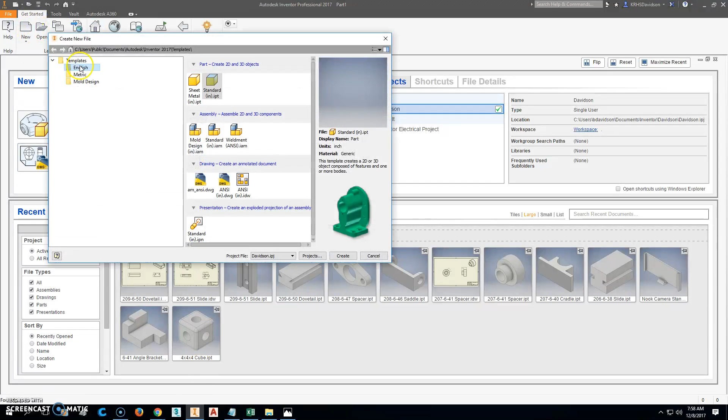We're going to start a new drawing, and it is an English drawing from there. So we'll click 2D sketch and start right here, and we'll start by making that circle that is 0.88. Notice I didn't put it right on there because I want to make it coincident constraint and put it right on that, so it's fully constrained. I can finish the sketch and look at that.

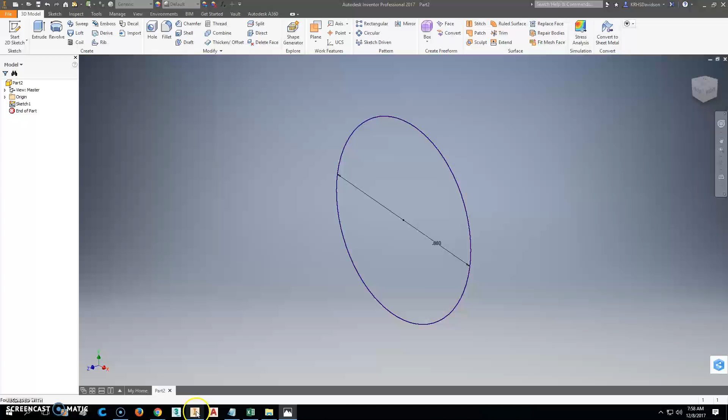And so that 0.88 goes back 1.5. So we'll extrude it 1.5, and I'm just going to go the other direction to keep my origin point there. So we'll go 1.5 and enter.

Okay, then we also had a circle right here. Right click right here and click a new sketch. And I'm going to put a circle on right here, that was 0.5, and I'm going to make it a concentric constraint between those so they have the same center point.

And we'll go ahead and extrude this so it cuts out, I think it was 1.25... 0.25, oops. So let me double check here real quick. I'm going to make sure it goes 1.25 deep, yep.

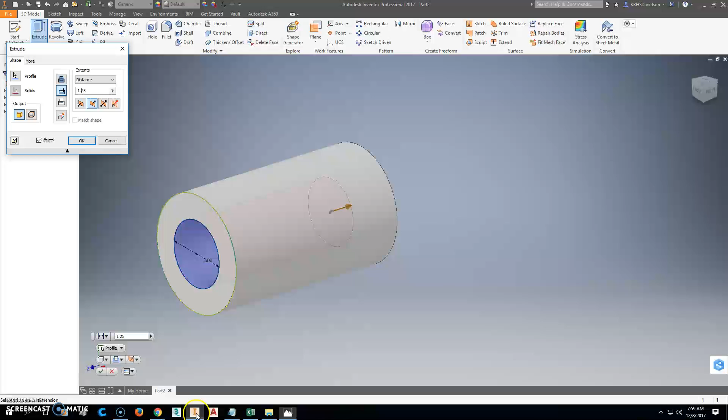Alright, so we've got that part figured out. The next thing we're going to do is the entire length of this part is 4 inches, we just made that 1.5. So we'll extrude this, or we're going to draw a circle right here on this. Create a new sketch, draw a circle here.

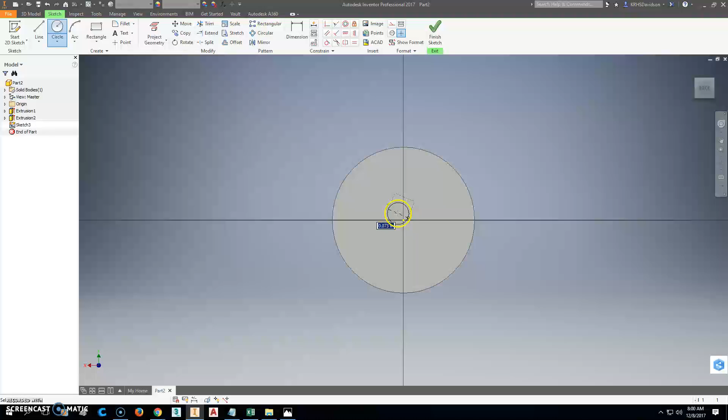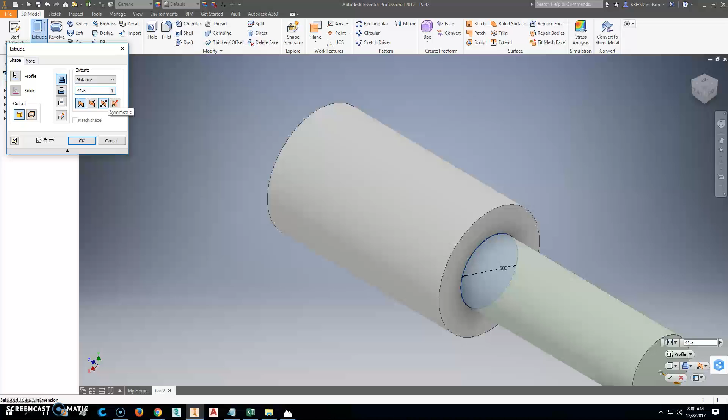And we'll make that 0.5 because that's what the thread is. We finished that sketch and we're going to extrude that then 1.5, or it'll be 4 minus 1.5, and that gets us the length we want it to be. Alright, so then we've got that part of it there.

There's a chamfer here, looks like there's a chamfer on both ends. Oh yeah, so there's a chamfer here, there's also a chamfer right there. We'll get, and then these 2 holes that are tapped holes that go in there. So let's try something.

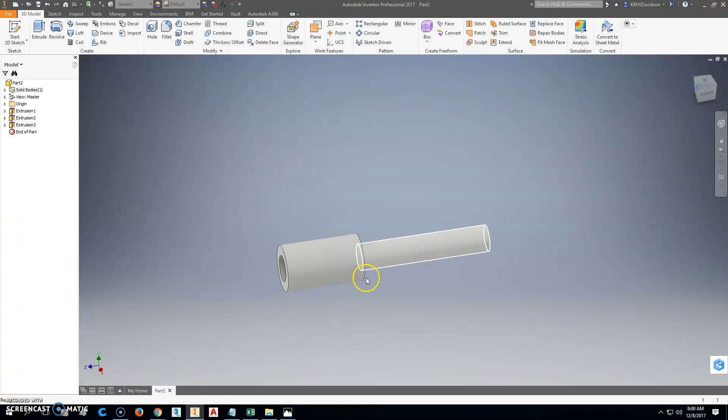We're going to try to put points right there on that surface. Actually, we're not. What we're going to do is this, we'll go over here, and because we went through the origin point, we're going to find the plane that goes through that center. So that's the plane we're on.

We're going to right click right there and click new sketch. Alright, if you hit F7 on your keyboard, it'll cut your part in half, and we're going to go ahead and put a point here, and we're going to put a point here. We're going to say that they are horizontally constrained, although I think I put them in place. Oops, we want them to be vertically constrained instead. So I want that yellow line to go through the middle there.

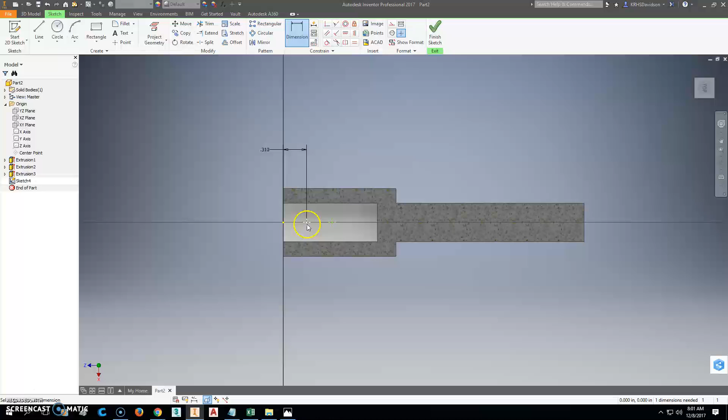Vertically constrain those together, so now they are vertically constrained, and the dimension from there to there was 0.31. Notice it turned blue, and the dimension from here to here was 0.5. Alright, so now that's fully constrained also. So I'm going to finish that sketch.

So what I'll do next is I'm going to use the hole command. I'm going to use a hole, and I want these to go in the other direction, I want them to go up. And I'm going to change this to be a threaded hole right there, so that's what you use, a threaded hole, when we want to make threads. So we'll click that.

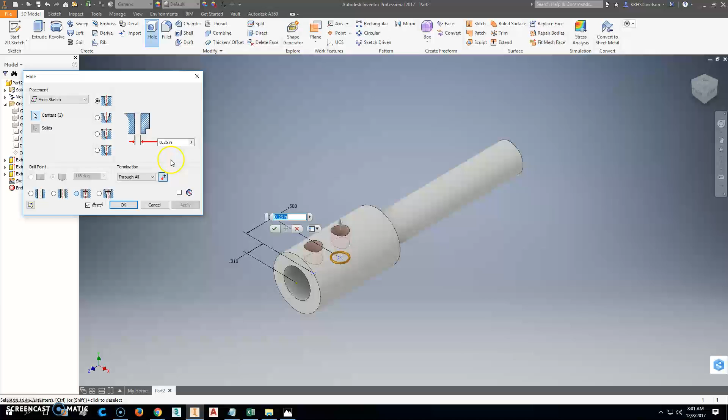Really interesting. It just took a second for it to think its way through it.

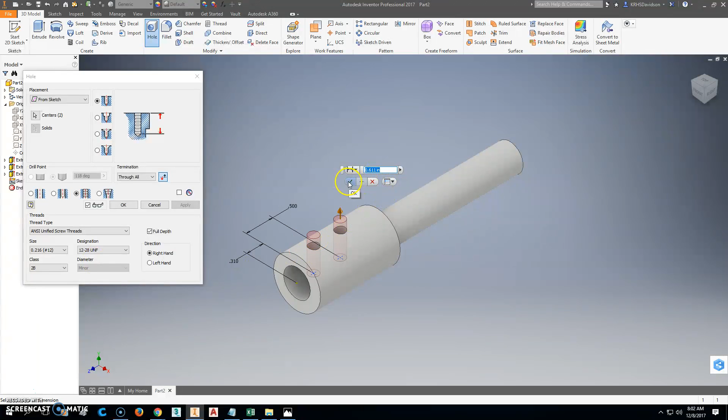So a threaded hole, and I wanted that to be a number 12. We don't want that. We want a number 12 thread. That's the one we want right there, see, it says number 12. So that's a 12 thread goes through. A 1224 is the one I think it said. Where was it? Right there. 1228. Let's see if we can find that one. 1228 is a fine thread, so we'll put those in there like that, and that should be good. You'll see it puts threaded holes inside of that. So that's how you do threaded holes.

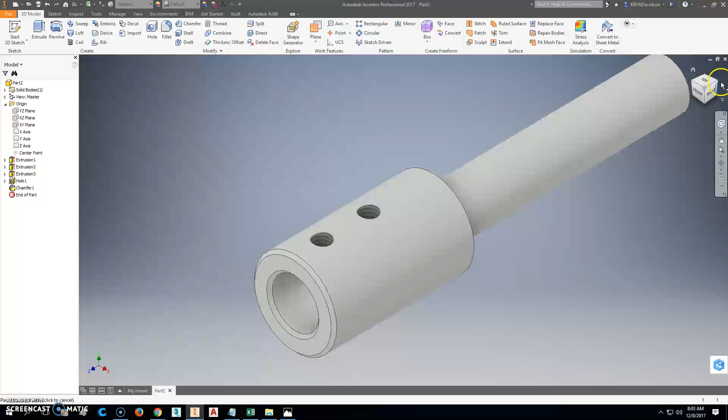We'll go ahead and put the chamfers. We're going to do that chamfer now, and it's a 45-degree chamfer, so that's the same on both sides. That's 0.03, so we'll make the distance here 0.03, and say that's a 45, and that's the angle. Then we'll click this face and say we want that loop and that loop right there done. We could also check that, and pick this side over here because we want to get this face right there with a chamfer on it.

Alright, so now our part's starting to look the way we want it to look. This whole end down here is done. All we've got left is that half-inch thread there that's 2 inches long.

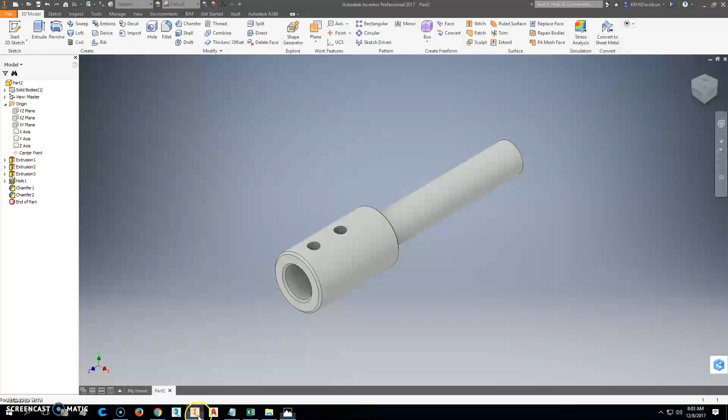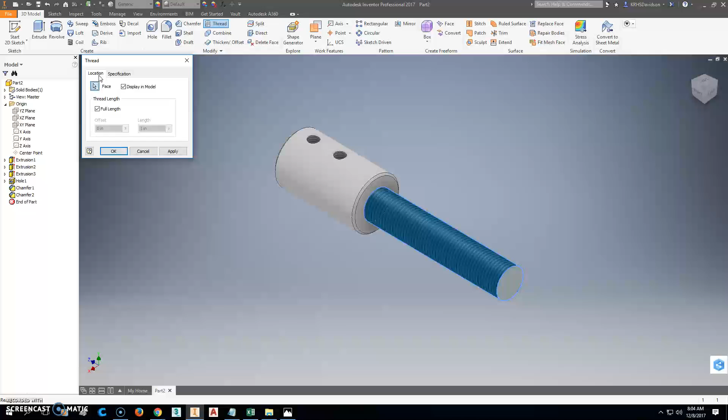So if we just click thread, we'll click this part right here. Now see, it puts that on there, and it automatically, for specification, picks the half-inch thread that goes on there. So it was a half 20, which is also a fine thread. We'll go back here and change this to a half 20. We'll pick that one right there, and you'll see it change the thread over here, so the thread's a lot finer. We'll go back to the location of this. We don't want it to go the full length, we only want it to go 2 inches. So that's 1 inch there, there's 2 inches there, so that leaves that little bit right there.

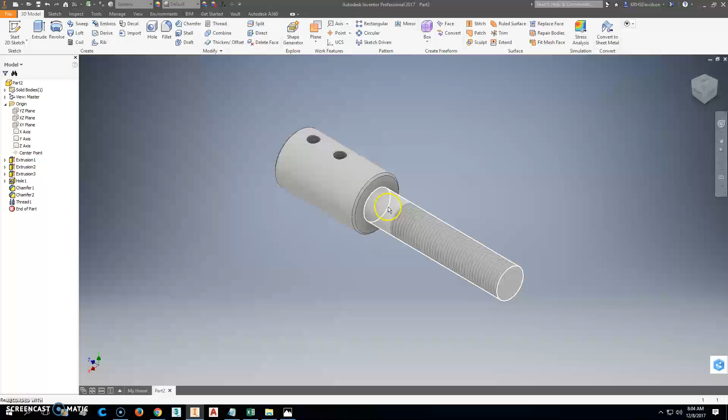Just for your information, this part right back here that doesn't have a thread is called a relief.

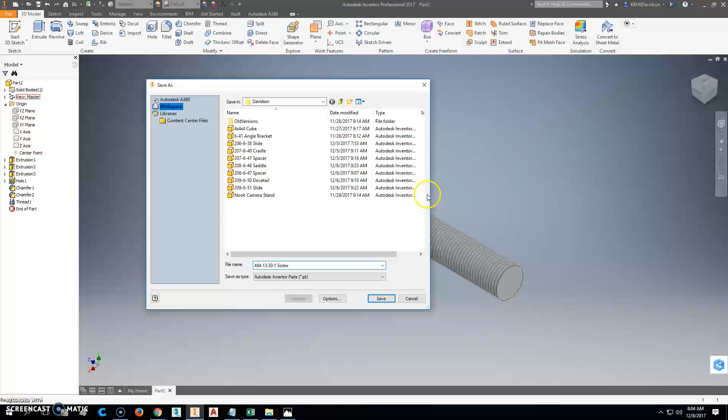Alright, so now that we've got that, we're going to go ahead and save as. We'll call it 484-13-30, and this we'll go -1, and we'll call it the screw. So that's the screw, and we'll go ahead and make the drawing for it.

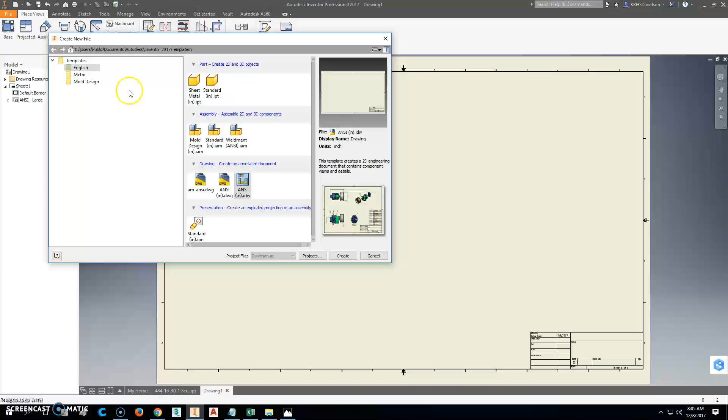Alright, base view, way too big. Did I click the right thing, the right drawing? Start a new drawing, and that's what I wanted. So I'm going to click base.

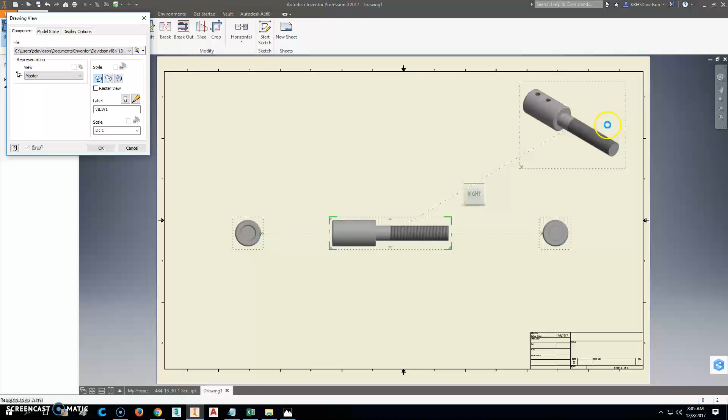We'll change this to go sideways this way, that's much better. I'm going to put this one in here because there's two things. I'm going to make that my front view. I won't need a top view because it'll be identical, so I'll just go over here and do a right side view, and I'll do a left side view there, and I'll go ahead and put an isometric up here. Right click and enter. This is actually probably the best way to do this.

Note that it gives you these double lines right there. That's the minor diameter of your thread, and this is the major diameter of your thread. Same thing goes for right there.

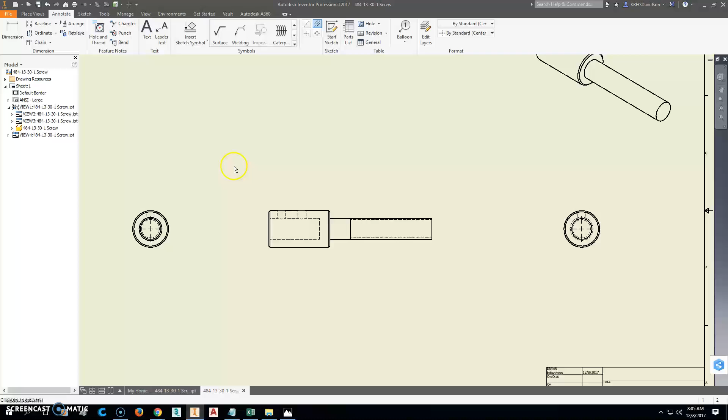So first thing we'll do is annotate this, and we're going to put in center points first. So we'll put in a center point here, and we're going to do centerline bisectors between here and here. We'll come over here and do them between this one and this one, and then this one and this one. We'll also do them between this one and this one, and it's going to make that short, so we'll fix that in a second.

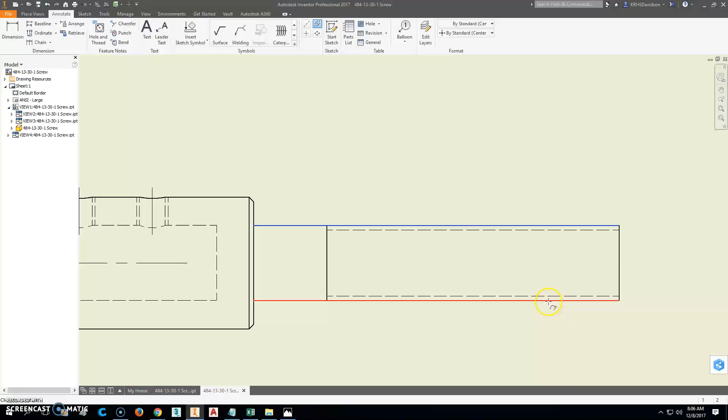The other thing we want to do is one between here and here, so the whole thing is straight all along. That being said, we can click on this one and delete it, and just grab that grip right there and drag it straight out so it goes beyond that part just a little bit. So that's the centerline bisectors we need, and we'll put one more right over here. I wonder if I can do that. Grab this one and just go straight up. That's exactly what we want.

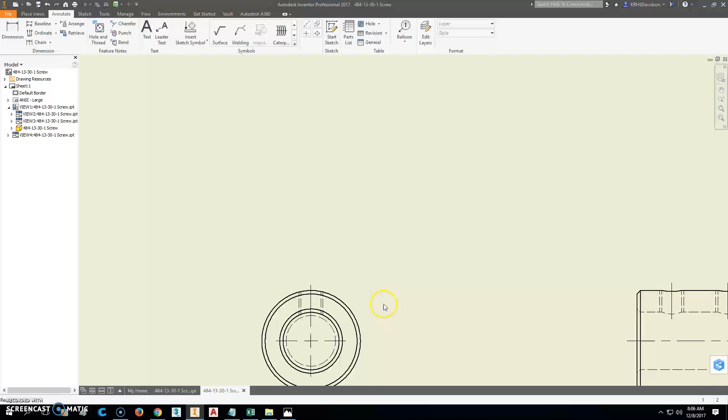And it does the same thing. Perfect. So now we can start dimensioning.

So we'll put a dimension on, and we're going to start with the dimension that tells us how long this part is right here. Oh, well, guess what? I just realized I have to change something.

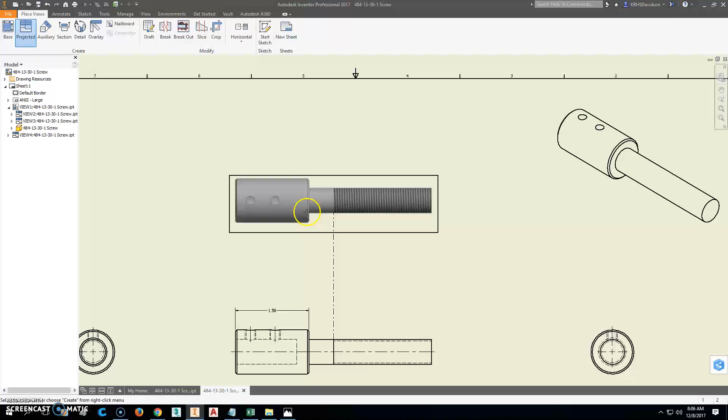We're going to try this. We're going to go to Place Views. We're going to project this one back up here anyway because we've got to dimension those holes, so we want to put a dimension in for those.

So now we should be able to go from, oops, I'm getting closer so I don't mess it up, go from here to there. And then we'll go from this one to that one.

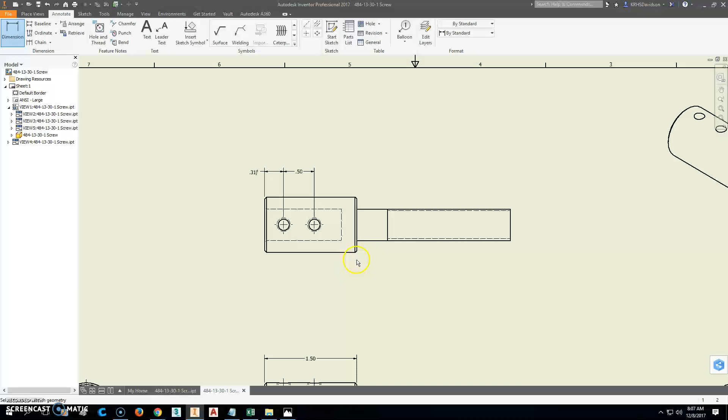Alright, now we've got that located. I'm going to go ahead and do a centerline bisector here to here. And just to make this look nice, I'm going to go ahead and do that. I'm not going to go any farther than that because I want it to look good, I want it to be very readable.

Alright, so that being said, that's 1.5, and this one tells us the distance is there. So you've got those two covered and that one covered.

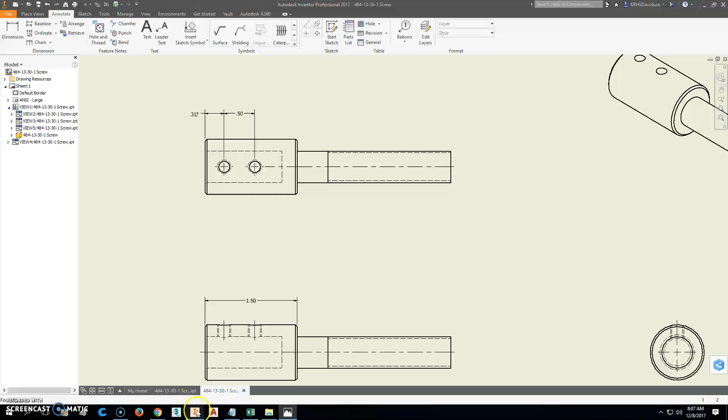We'll come back over here and go to the end over here on this part, and we want to dimension this hole here. So we'll put a dimension in for that hole. That tells us 1.5. So what we have to do here is if you look at this, this is

0.5, and that's a depth symbol there. It goes 1.25 deep. So we're going to change that to 1.25. Click, something wrong.

We'll put a by symbol there, and then say use it. Oh wait, we won't do that. What we'll do is we'll use the depth symbol, which should be.

It'll take me a second to figure this one out. That's not what we want. I thought it would show that. Oh, there it is right there. The depth symbol is 1.25, so that tells us how deep that hole is right there.

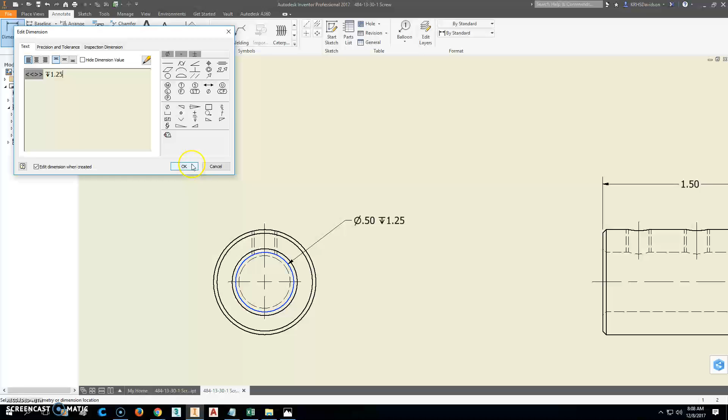We also want to put a diameter on this right here to tell us that. Alright, then we'll go back over here and we're going to do a leader on this part, and we'll click right here on this little line.

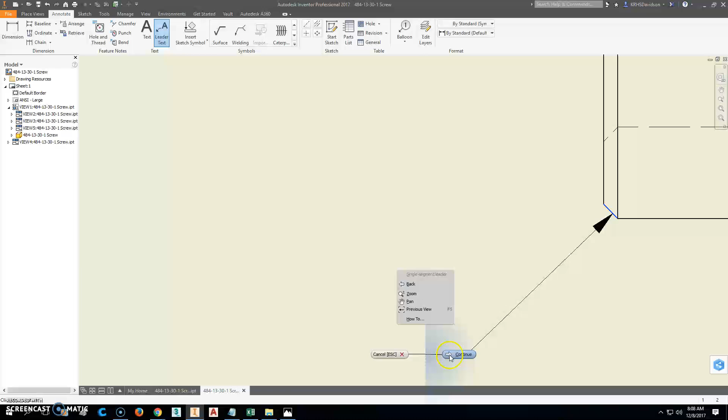We'll click continue. So it takes that straight out there, and we'll make that the same as this reference right here. We're going to say 0.03 by 45 chamfer, and we'll go 0.03 by 45 degrees.

Where's the degree symbol? I forgot where symbols were. Oh, right there, degrees.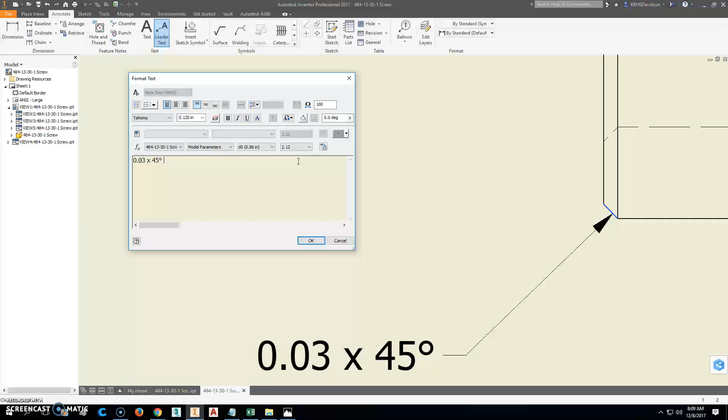Chamfer. Oops, let's turn the cap lock on. Chamfer, and we'll do that in 3 places. And this tells them that chamfer right there goes here, here, and also right here.

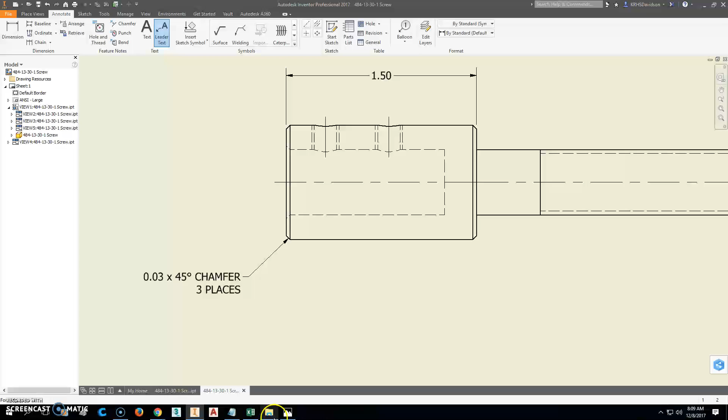Alright, and if they know what they're doing, then they found that, and they went from that part right there. So we've got this one covered, this, and this. So we're going to drill and tap for a 12-28 screw.

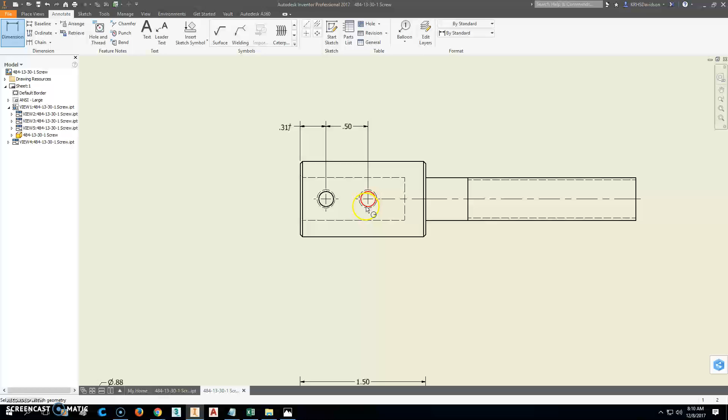So let's go back up here. We'll go up to this part, and we're going to make a leader actually right here. Let's try this. Let's do a dimension, and we're just going to put a dimension on here and go like this, and we're going to overwrite that.

And we're going to say that it is a 12-28 UNF, so that's a unif. Oh, we want to hide that value, that's what we want to do.

It's a 12-28 UNF, that's a fine thread. And we'll say through, and go down here and say 2 places.

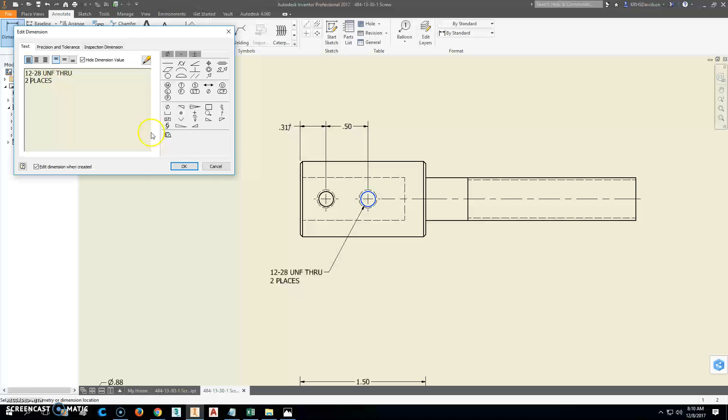Oops. So that's how you're going to squeeze that one in there. Alright, so we've got that part figured out. So now the only thing left is this right here to tell us what that is.

So we'll go back to this. And sometimes the best way to do this is to put a dimension on from here to here to tell us that's 2 inches there. And we can put a dimension on that.

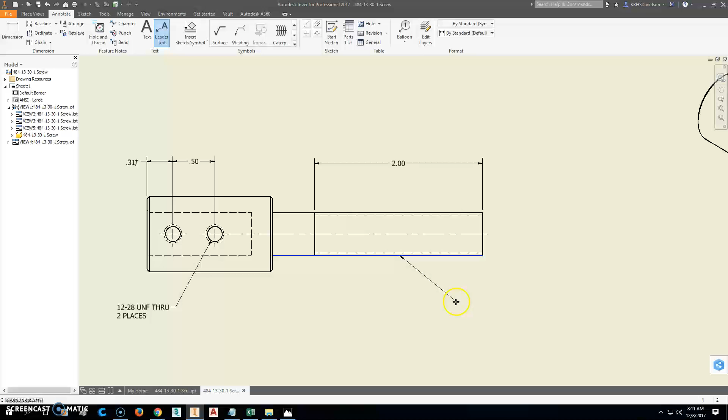Let's say we'll put a leader. The leader goes from, we can put it right here. That says right click and continue. And we want that basically to say the same thing here.

We can say it's a 1/2 by 20 UNF. 0.50 by, oops, no, not by, -20. So that 20 means there's 20 threads per inch on that UNF. UNF 3A, so 3A is the designation for the tolerance zone on that.

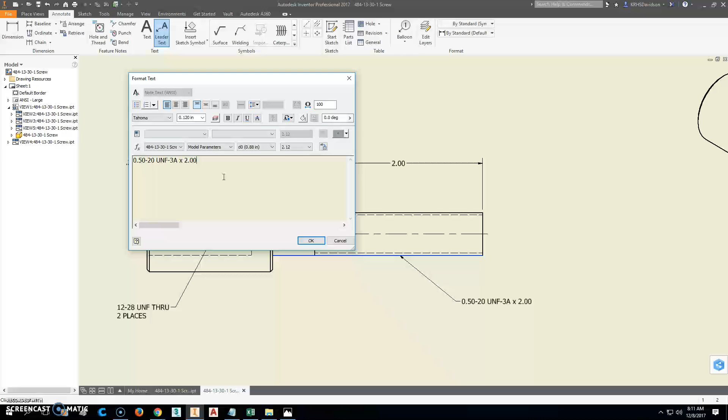By two long, oh, we don't need to do that. We could do that, by 2.00 long. Alright, so that's what that looks like.

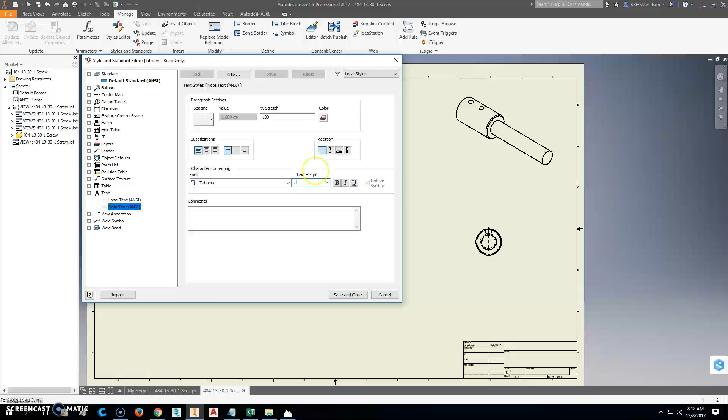So now that we've got this part figured out, we'll go up here and we're going to go to environments. Oops, oh it's manage. Styles editor. We're going to change the text size, so that note there, we're going to change it to 0.24. Save and close. So that's all a lot bigger there so we can see it now.

The next thing we'll do is go to File, go to iProperties. We're going to change this to be the